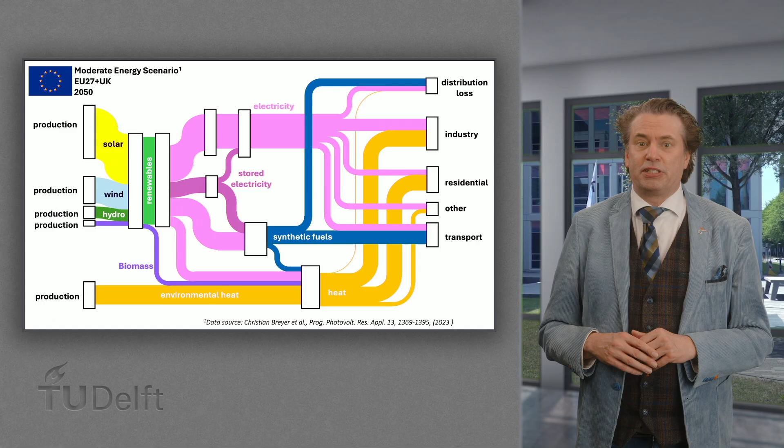Welcome back. In the part 1 video lecture, we discussed how a future 100% renewable energy system can look like. This model shows that on the generation side, the capacity of installed wind and solar electricity generation has to grow drastically. Can such supply chains from materials, manufacturing and installation of photovoltaic systems and wind turbines be realized?

You can simply divide the evolution of installed capacity for a technology in 3 phases. The last phase is the replacement market. Just as much capacity is installed as is being dismantled. The annual installations are determined by the total installed operational capacity divided by the lifetime of the system. The first phase is that both total installed capacity and annually added new installations are exponentially growing in time. The first phase ends at the point when the annual installed capacity does not grow anymore.

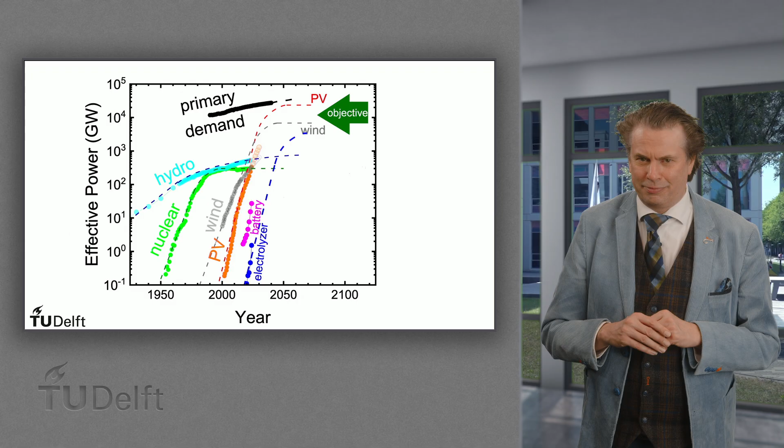Next to the model of the Energy Watch Group on a global energy system based on 100% renewable energy I have introduced in this video and the previous videos, many other models exist and have been published in scientific literature by scientists, associations, governmental advisory committees, and industry itself. Do all these models result in the same final topology of the future energy system? The answer is no. I demonstrate that with the next graph out of a paper I have co-authored together with many experts around the world.

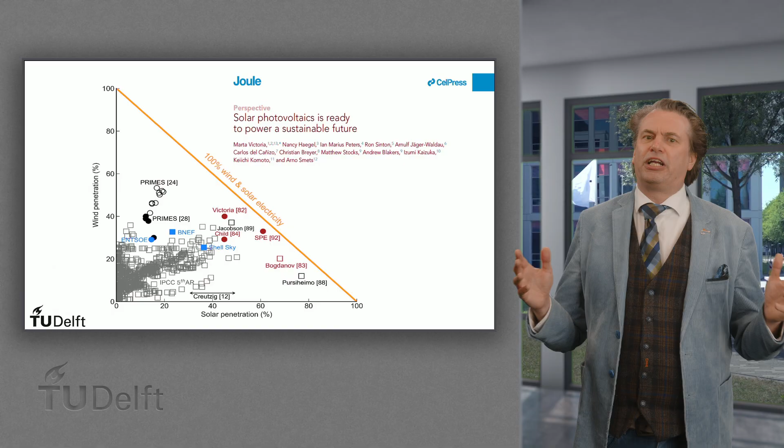The method we use here is the penetration of solar and wind energy to the energy system. In other words, what is the final share of solar and wind energy to the total energy mix? The penetration of solar is plotted on the horizontal axis and the penetration of wind is plotted on the vertical axis. As you clearly can see, the results of all models scatter broadly in the wind-solar penetration space. Why do all these models give so many different results? Many reasons can be given.

The quality of the technical model that simulates the operation of the energy system, what is the time resolution, to what detail in the space are the components in the energy system worked out in the model? Another aspect is the assumptions put in the model and the quality of the data being used.

As you can see here, the integrated assessment models of the fifth assessment cycle of the IPCC resulted in a rather low penetration depth of solar energy. The reason being, outdated cost data for photovoltaics was used. Cost prices for 2050 were assumed that were even higher than the cost prices already realized in 2020. It's logical you will arrive at a low solar electricity penetration depth.

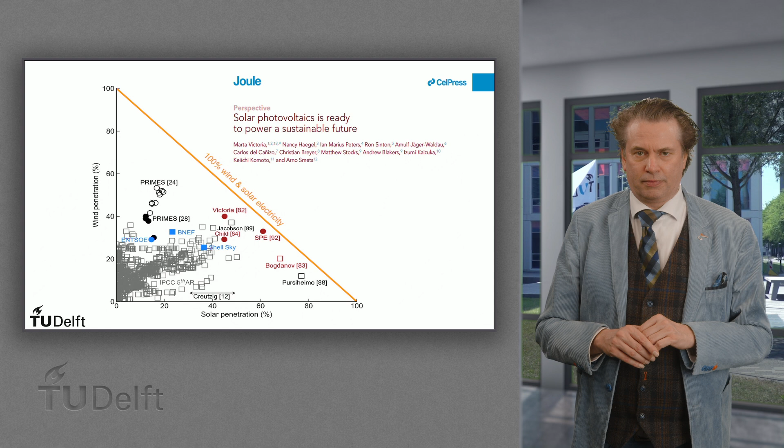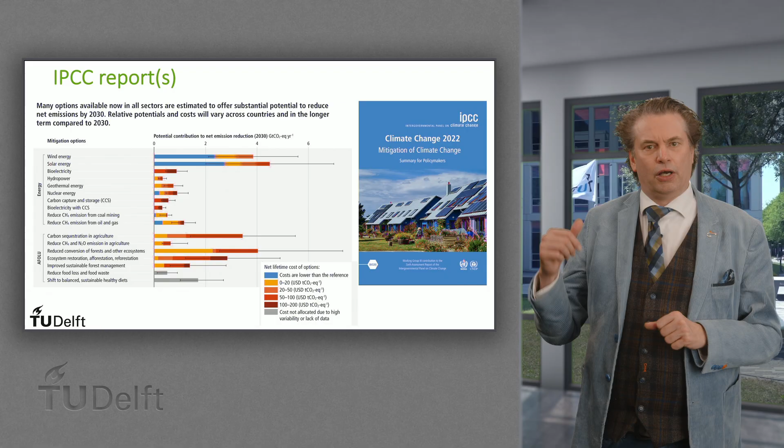In summary, the maturity and cost price for solar and wind energy predicts a dominant role of these technologies in the future energy mix. And let's assume we would realize the around 8 gigatons of CO2 equivalent per year reduction by the deployment of solar and wind. We would in principle be able to follow the CO2 emission scenario that ends at a 1.5 degree global warming at the end of the century.

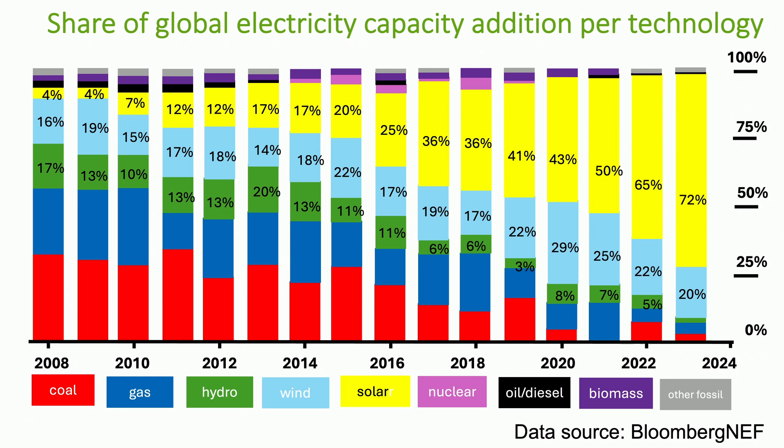Another way of looking at the energy transition we have seen so far is looking at the share of global electricity capacity addition per year per technology. So this is the new capacity of plants, installations to generate electricity added every year. Note it does not include the dismantlement of various technologies. I show here the data from 2008 up to 2023.

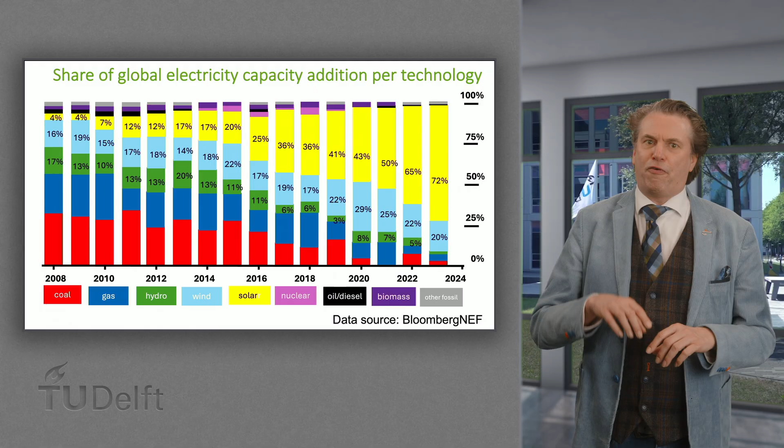The red and blue colors represent the coal and gas plants that convert fuels such as gas and coal into electricity. It is clearly seen that these CO2 emitting technologies on a global level are quickly phasing out. If we focus on the renewable electricity generation technologies like solar, wind and hydro, their share of added capacity was globally over 90% in 2023. The energy transition towards a renewable energy infrastructure has started.

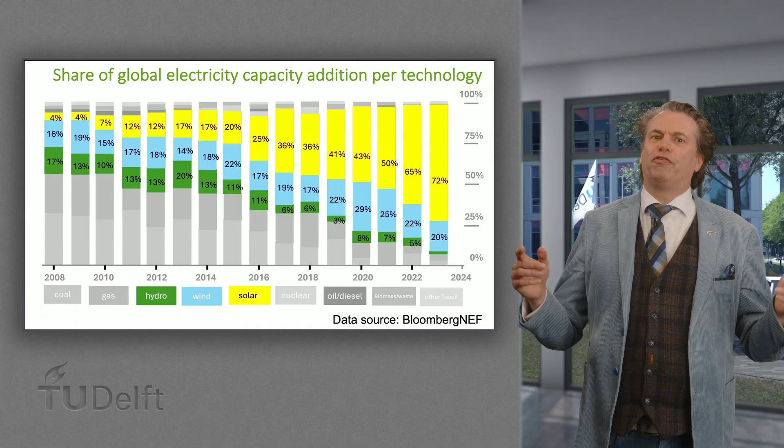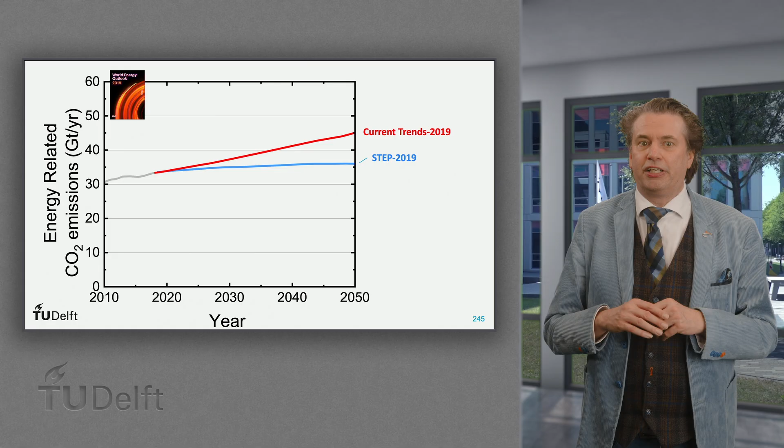The blue line represents the International Energy Agency's Stated Policies Scenario, STEPS, which is a World Energy Outlook scenario that projects the future energy system based on existing government policies and announced plans, providing a baseline of current trends, not aspirational goals, showing a trajectory leading to a significant global warming of around 2.5 degrees Celsius by the end of this century if these policies are fully implemented without further action.

Next to the STEPS scenario, the International Energy Agency introduced the Announced Pledges Scenario. The Announced Pledges Scenario is a model that gives a future where governments and industry meet all their stated climate and energy transition commitments, like the net zero targets and nationally determined contributions, fully and on time, even if specific policies to achieve them aren't yet in place. So commitments are not the existing policies and announced plans.

The APS serves as a benchmark. It would correspond to potential outcomes such as a 1.7 degrees Celsius warming by the end of this century, illustrating the significant difference ambition makes compared to just current policies, but it is not a prediction, just an exploration of announced goals.

In addition, the International Energy Agency introduced the net zero emissions scenario. The Net Zero Emissions by 2050 scenario is a detailed pathway for the global energy sector to achieve net zero CO2 emissions by 2050, consistent with limiting global warming to 1.5 degrees Celsius, requiring massive shifts like tripling renewables, doubling energy efficiency, eliminating fossil fuel investment, and widespread electrification by 2030, with developed nations leading the charge.

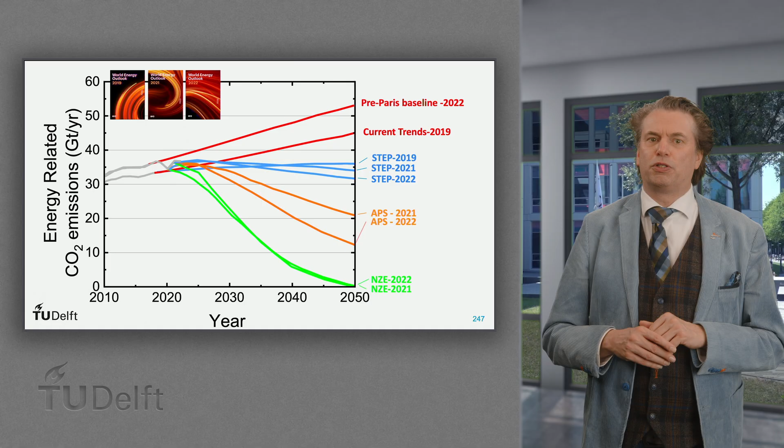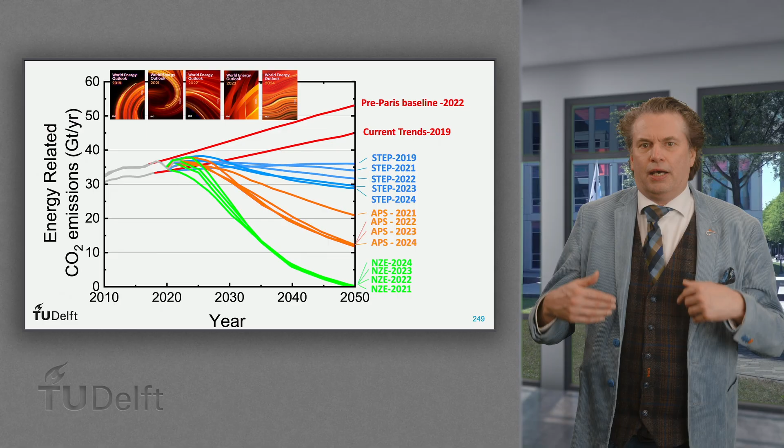In these two video lectures, we have discussed an example of how a 100% renewable energy future can look. We also have discussed typical timescales of introducing new technologies for the energy transition and how our current existing policies, announced plans and announced ambitions for the energy transition relate to the various scenarios for CO2 emission reduction. I hope this week has been a helpful introduction into the general concepts of the energy system and how the transition to renewable energy systems can be made. In the following weeks, my colleagues will dive into more details of various aspects of the energy system, like the electrical power system, sustainable heating systems, industrial decarbonization, and energy markets and policies.